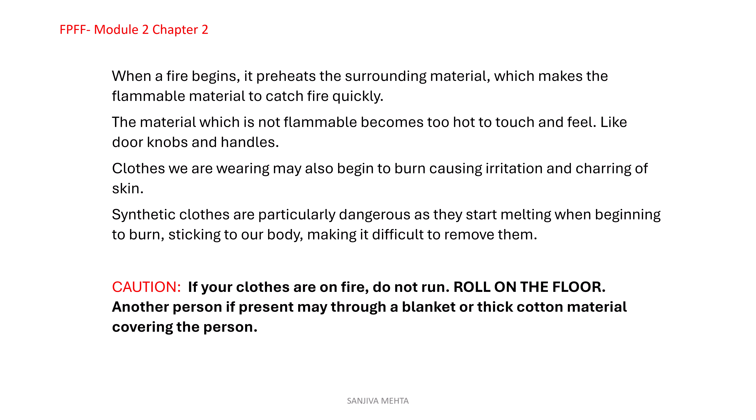What information do we get from the fire triangle explained in the previous chapter? Remember the fire triangle? For the fire to begin, we need all three things. That means all three sides of the triangle must be present. What are they? Flammable material, source of ignition, and air or oxygen. They have to be present at the same time together.

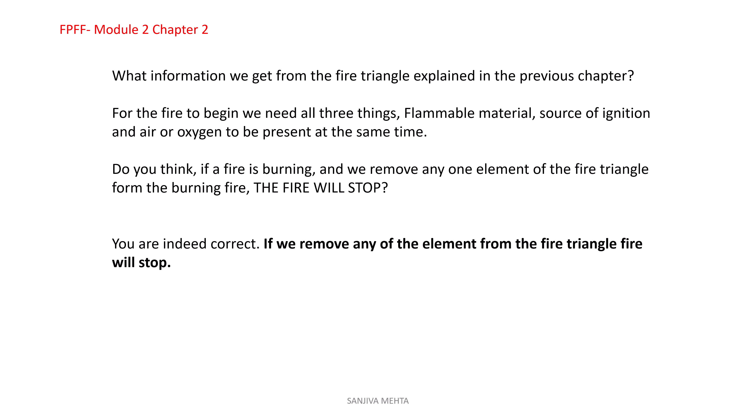So do you think if a fire is burning and we remove any one element of the fire triangle from the fire which has occurred, the fire will stop? Indeed, you are correct. If we remove any element from the fire triangle, the fire will stop. This is the beginning of our effort to douse the fire. This is the way we douse the fire actually. Fighting the fire is different, explained in later modules. But this is what we can do to stop the fire.

Therefore, to extinguish a fire, remove oxygen or air, because air has 21% oxygen, 20.8 actually. Remove the source of ignition, or if the material has already caught fire, reduce its temperature. Remove the flammable material. Okay. So remember, once a fire is started, these are the ways we can stop it. And once a fire is stopped, remember it can reignite if the temperature was not brought down sufficiently and the fire was still smoldering.

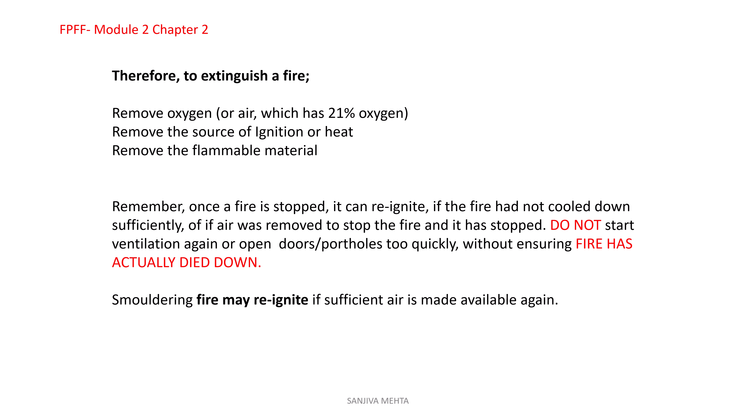So either we have to make sure that it's cooled down sufficiently, that the temperature is not sufficiently high to reignite it, or if the air was cut off, do not supply air once again until and unless you have confirmed that no smoldering fire exists. So do not start ventilation again or open doors, portholes too quickly without ensuring the fire actually died down and there's no chance of it reoccurring. Smoldering fire may reignite if sufficient air is made available again. Remember that.

So remove oxygen. Air has 21% oxygen. A logical question arises: what minimum percentage of oxygen is required for the fire to begin or to sustain, if the other two, that is flammable material or vapor and the source of ignition, are present? What is your answer? Yes, it is 11.9.

Commonly we call it 12%. So it's the minimum percentage of oxygen which must be present so that the fire can begin. If the percentage of oxygen is below 11.9%, fire cannot begin no matter how high the temperature is and how much flammable material is present. Understood? So this means if the oxygen percentage is less than 11.9, mostly we call it 12%, the fire will not occur, even if flammable material or vapors and a source of ignition are present.

It also means a fire can be extinguished if the oxygen percentage is reduced to 12% or below. Correct. That is why, in the previous example I told you, when clothes are on fire and we cover the person with a thick cotton cloth or a blanket, we cut off the air supply. Or the other example I gave you, when a gas cylinder at home is on fire, you cover it with a towel. What are you doing? Cutting off the air supply, oxygen.

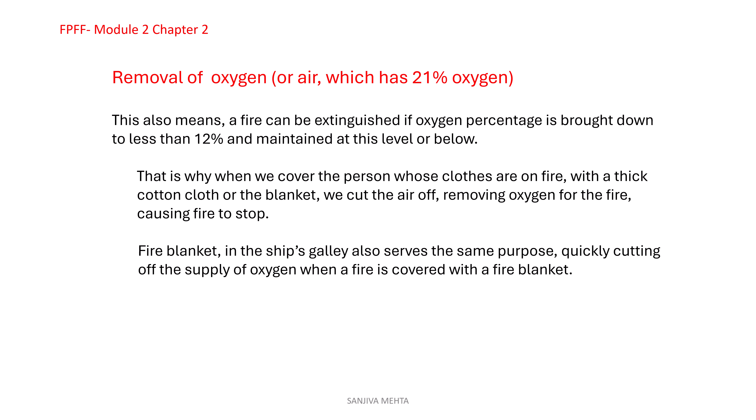Remove the source of ignition or heat. We have learned that heat or a source of ignition is required for the fire to begin. Heat or a source of ignition can be a direct flame, like when we use a matchstick to light a candle. We are using direct heat from the flame of the matchstick to burn the candle. Mechanical or physical action like friction. Actually, when we strike a match against the coated side of the matchbox, what are we doing? It's a mechanical interaction. Friction occurs, and friction generates enough heat to ignite the matchstick.

Chemical reaction. Many chemical reactions are what is called exothermic reactions. Fire is a chemical reaction, an exothermic reaction. Exothermic reaction means giving off heat. This chemical reaction causes enough heat and causes a fire. Fire itself is a chemical reaction, but because of a chemical reaction between two substances, a sufficient amount of heat may be generated so that flammable vapors, if present, will catch fire.

Nuclear reaction, like what is occurring on the sun. Actually, fusion is taking place. Enormous heat is produced by the nuclear reaction taking place on the sun, where hydrogen atoms fuse together to form a helium atom, giving off enormous heat. So these are the sources of heat. If you remove heat, fire will not occur. We'll not talk about nuclear reaction on the sun because that is out of the scope of this course. As I just said, item D is out of the scope, so we'll not consider that.

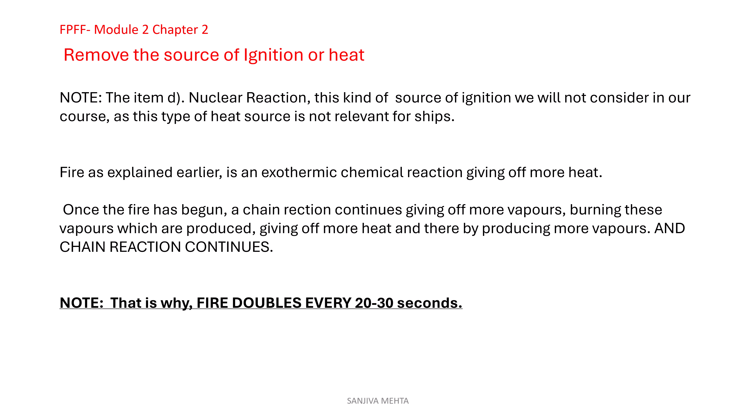The common sources of ignition on the ship are smoking, pipes carrying steam or other hot liquids with insulated lagging broken or removed fully or partially. Flammable material like fuel oil can fall on these pipes and ignite. Electric spark, faulty electrical equipment, and hot work such as gas welding or electric arc welding are potential threats if precautions are not taken.

Using multiple plugs in an electrical socket is one of the simplest things which can be avoided, yet it has caused a number of accidents on ships. We are so used to using a multi-socket extension cord at home that we carry it on the ship also and use it there. But one socket means one plug only, nothing more.

Static electricity - you know what that is? You must have seen synthetic material clothes, when you take them out, the hair on your hands or head rises up. Sometimes your comb becomes erect when combing your hair. We'll talk more about this in the tanker course, because when cargo oil is flowing during loading, that also generates static electricity.

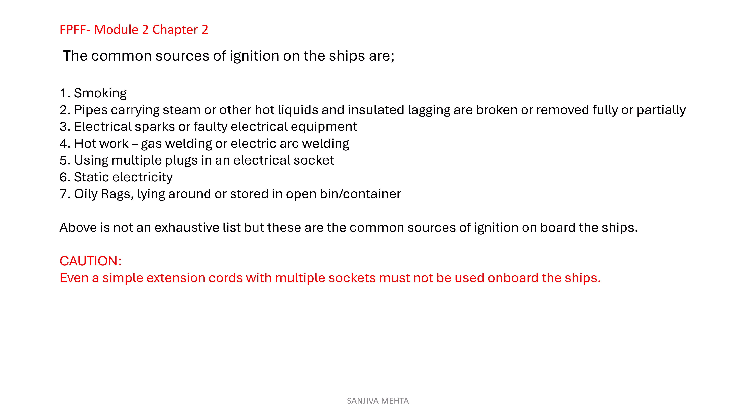Removal of sources of ignition: smoking, if required, must only be done in the designated smoking room, not in the cabin. Never smoke when lying down on the bed in your cabin - actually never smoke in the cabin, and of course never, never, never when lying down on your bed.

All pipes carrying hot fluids must have their lagging intact, and broken or partially removed lagging for any work must be replaced soon after the work is completed.

Whenever flow of current is stopped or started, a spark is invariably generated - understood what I am saying? Whenever current starts to flow or stops, there will be a spark. It can be larger or smaller, but there will be a spark. Even intrinsically safe equipment has a spark.

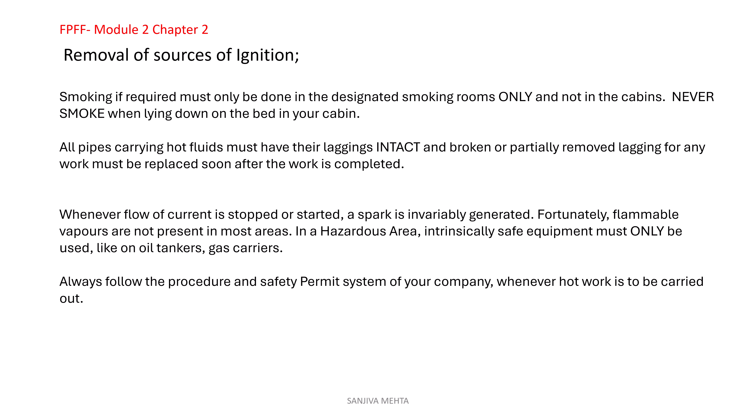Always follow the procedure and safety permit system of your company whenever hot work is to be carried out - precaution is better. Removal of sources of ignition.

Coming to static electricity, as I told you, synthetic clothes can also generate static electricity, but that is not sufficient to cause a spark or start a fire. However, static electricity generated on ship when oil cargo, especially certain types called static accumulating oils, flows through the pipeline during loading or unloading, a large amount of static electricity is accumulated.

Earthing must be ensured to ground the pipe so that generated static electricity does not give off a spark. Otherwise, whenever this oil, which has accumulated a large amount of static electricity, comes in contact with a media which can conduct electricity, a spark will occur because it will try to jump across. So the pipe should be grounded.

Static accumulating oils have electrical conductivity of less than 50 picosiemens per meter, so they have very low conductivity. The electricity is not conducted but stored in the oil. Therefore, it is capable of retaining a substantial amount of electrostatic charge.

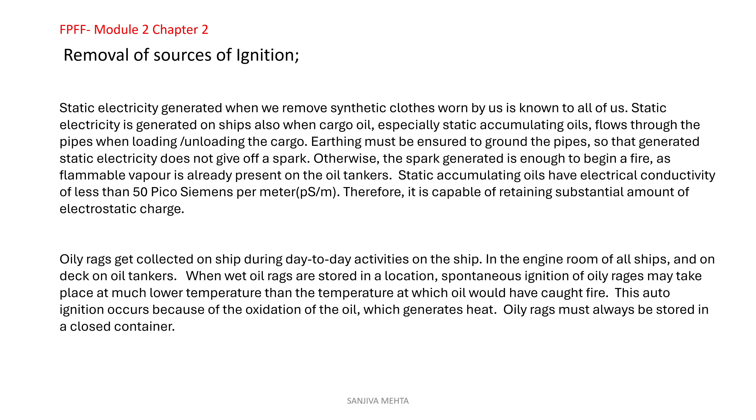So how does spontaneous ignition take place? In these oily rags, the oil contained in the soaked rags starts to oxidize. This oxidation is a chemical reaction, and this reaction gives off heat, generates heat. Then it's possible the oily rags may catch fire. So oily rags must always be stored in a container which is closed with a lid. Definitely, positively, compulsorily.

Remove the flammable material. We had learned that flammable vapor only catches fire. Any material which is capable of burning must release a sufficient amount of vapor, which will start burning if the other two sides of the fire triangle are present. That we know.

So what is the temperature at which sufficient vapors are given off by a flammable material? Let us learn a new term: flash point. Flash point is that temperature at which a flammable material gives off sufficient vapor which will catch fire if oxygen and the source of ignition are present.

So the flash point at a certain temperature is important to know about various media which we are using on the ship. We will learn about some of the words and terms used in the context of firefighting in the forthcoming module. I will not be explaining all the terms, only this one has come up in this context - flashpoint I have explained.

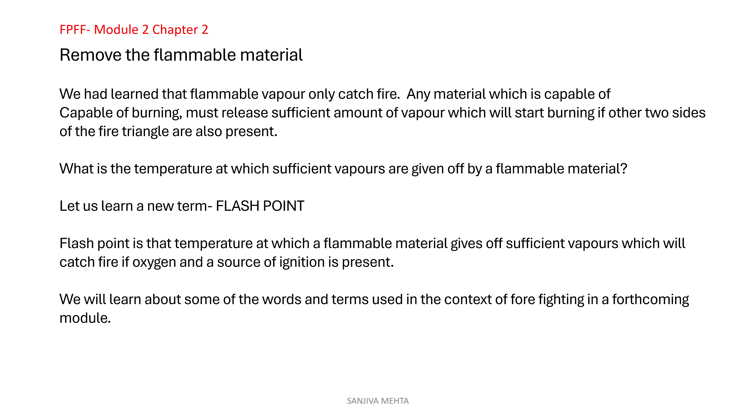Remove the flammable material. Different flammable materials have different flash points. For example, the flash point of petrol is -40, and for marine diesel engine fuel it must be more than 60 degrees centigrade. This is a mandatory requirement. On board the ship, fuel used for ship propulsion or power generation, electricity generation, must have a flash point above 60 degrees centigrade.

This is a mandatory requirement. For wood, flash point varies depending upon its moisture content and the type of wood. Typically, the flash point is between 250 to 300 degrees centigrade.

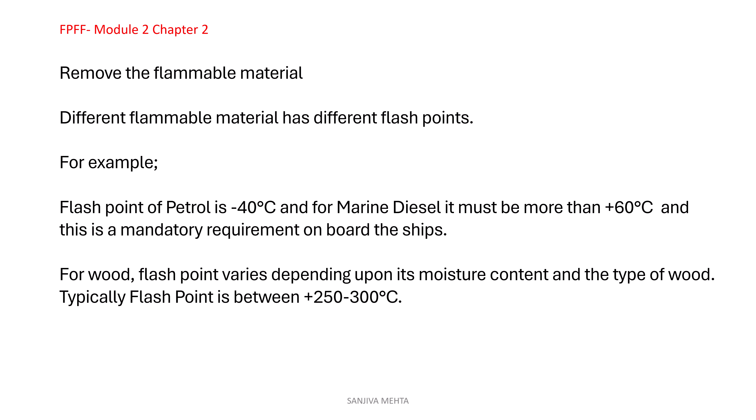I hope you find the lecture series interesting and encourage you to learn and look forward to more of the videos. Do spread the word amongst your mates on ship, ashore, and also to your company. So this is the end of module 2, chapter sustenance, spread of fire and suppressing it - not firefighting, suppressing it. Shortly I will prepare chapter 3 of module 2, and in chapter 3, as I was telling you, some definitions, relevant definitions and terms used in this course will be explained so that you understood the meaning of those terms before we proceed further.